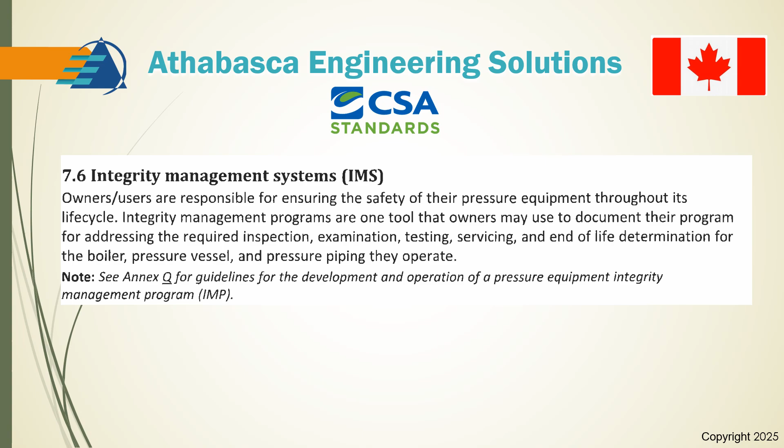So Annex Q is entitled the guidelines for the development and operation of a pressure equipment integrity management program, an IMP. So they don't provide any specifics. This is basically for information. So when we dig through this, we find that the first relevant section is Q4.2, Integrity Management Program Planning. And all it says is that the owner or user shall establish documented plans and schedules for inspection, condition monitoring, and other activities related to the IMP.

It also goes on to say in 7.2, performance monitoring and measurement, the owner/user shall establish and maintain documented procedures for periodic monitoring and measure of performance to an integrity management program. Performance measures shall include, for example, A, conformance to the established requirements and acceptance criteria, and that could be, for example, the wall thickness of a pressure component. And B, the effectiveness of achieving the objectives and the targets. So that could be looking at the rates of degradation of the equipment.

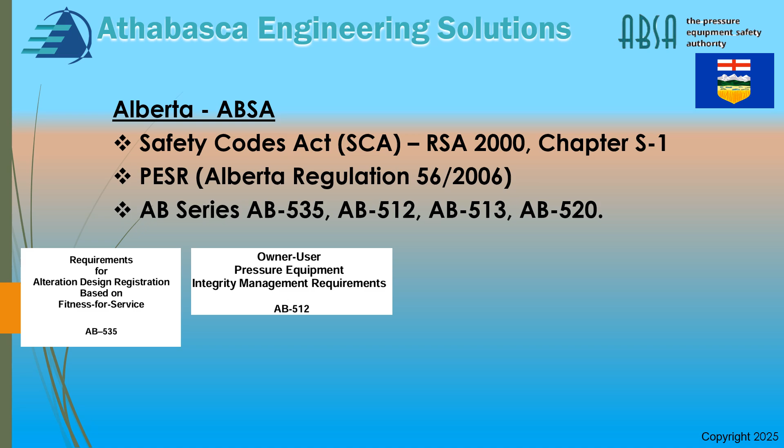And they go on to look at the requirements for the alteration, design, registration based upon a fitness for service assessment. That's what AB 535 is about. Secondly, we have the owner user pressure equipment integrity management requirements called AB 512. And it's also called a PEIMS by that jurisdiction. A little bit more about AB 513 is the pressure equipment repair and alteration requirements. And finally, they have a lot to say about finite element analysis, FEA guidelines regarding the use of FEA to support the pressure equipment design submission.

And out of all the jurisdictions in Canada, I can't speak for Quebec, but Alberta has the most extensive guidelines out of any of the jurisdictions that I've worked with in Canada by far. So if you're working in, say, Manitoba, you may want to consider looking at how they do it, because there's a lot of good advice there. It doesn't necessarily say that Manitoba, the jurisdiction, will accept that, but it has some really good approaches that are effective.

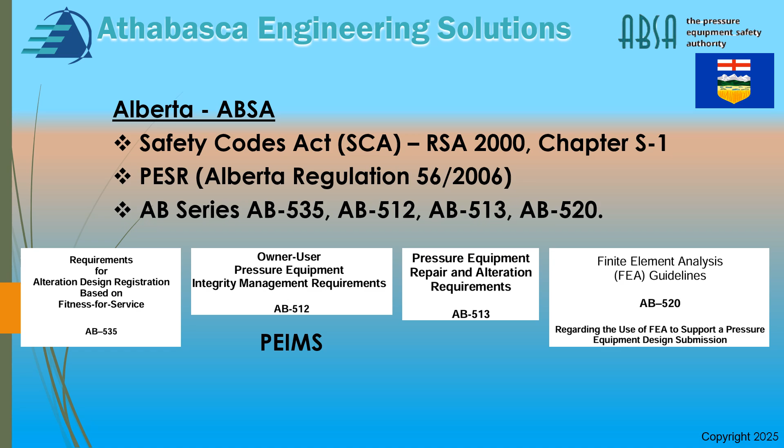Document AB 535 has some very specific conditions for use, and we're going to go through those. First of all, the Alberta ABSA jurisdiction, they need to have a valid reason for not performing the repair. So they don't just grant it. You have to demonstrate why you're not bothering to do the repair. Sometimes there's issues like time constraints during the turnaround, or the repair could further damage the equipment. It could risk further safety issues. Those are sort of examples.

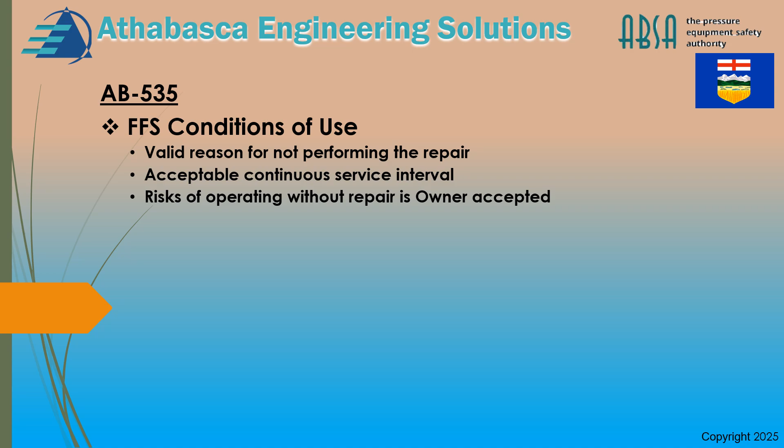Acceptable continuous service interval has to be established. The risk for operation without repair, it has to be very clear that the owner has accepted that responsibility. It's not on ABSA, and it's purely an owner responsibility. Procedures for the risk management and safe operation of the equipment. So there has to be, like, an established change process that gets reviewed, and risk assessment, hazard assessments, and those types of issues, so that the teams thoroughly understand the risks.

The operation of equipment must be managed by engineering and administrative controls, and the CSA has sort of outlined those requirements of having an integrity program. Record keeping and maintenance and monitoring programs are required, so there must be inspection records, maintenance, monitoring programs. So they may do some online thickness measurement, routine thickness checks, or monitoring crack growth, and that kind of thing.

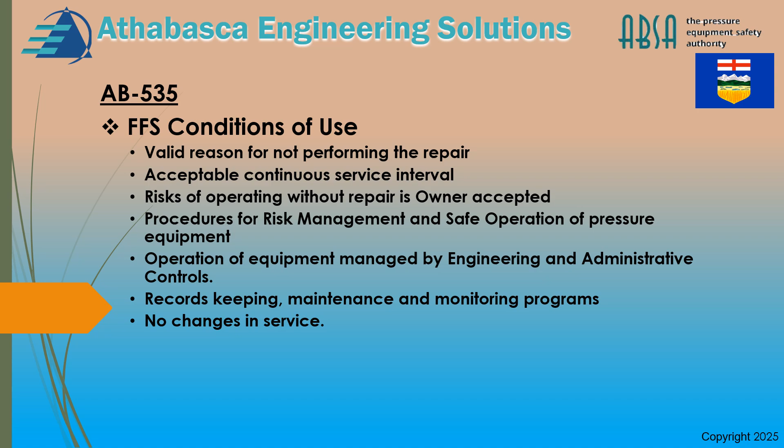And there can't be any changes in service. Say, for example, you want to increase the pressure on that system, and this code is a post-construction code. So you'd have to go back to the basics to do any changes in service from that point of view. So you can't use fitness for service for that application.

So what are the limitations to FFS? Well, let's look at that. The first thing is pressure equipment in public occupancy. That means, for example, hot water heaters and HVAC related items in buildings. This program does not apply to that. You fix it or replace it, that kind of thing. PR devices and their flanged connections, it doesn't apply. New construction, because fitness for service is considered post-construction. It's a post-construction spec, and the rules are different.

In upgrading of in-service pressure equipment, trying to re-rate equipment based upon fitness for service is not permitted. I mean, if you want to do re-rating equipment, which I do quite a bit of, you still do inspections, but you do the calculations based upon the new code for the uprating, but you don't go ahead and use fitness for service to do upgrades.

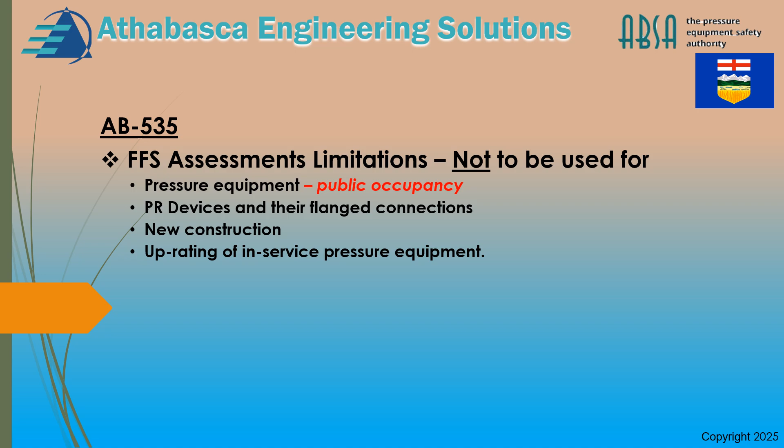Alteration limitations. The document says that when the acceptance is for a limited period of time, a condition, it can expire if the interval has expired. Say, for example, you have an interval of 2 years. It can be acceptable before you have to do a reevaluation. Then, if you extend that, then the acceptance has expired.

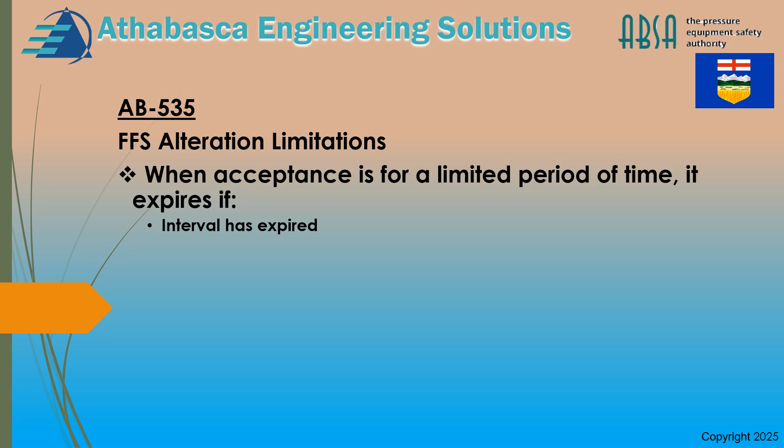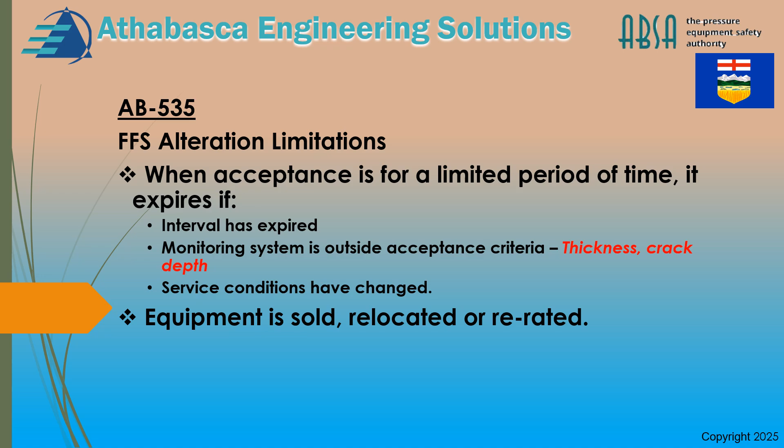The monitoring system is outside the acceptance criteria. So if the cracks have grown beyond that with monitoring and crack depth, for example, then it's expired. And also when service conditions have changed. One more thought: when equipment is sold, relocated, or re-rated, then basically the acceptance has expired.

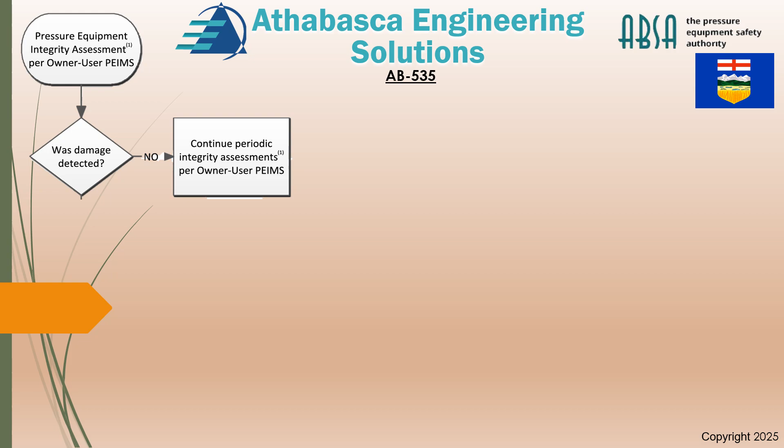Okay, let's look at the diagram. So this is the flow chart found in AB 535, pressure equipment integrity assessment per owner-user PEIMS criterion. Now, the first question is, was the damage detected? If there is no damage, then you would continue the periodic integrity assessments as per the owner's PEIMS. If it's yes, does the equipment meet the registered design? And if it's yes, then we would continue to do periodic assessments per the owner's PEIMS.

Now, if it's no, will the equipment be repaired? That is the second question. Then you would complete the repair as per the owner-user manual and the CAP, or following the ABSA AB 513 criteria. Will the equipment be derated? Because you can fix it, or you can derate it. If it's yes, then you need to complete an alteration form, that's AB 513.

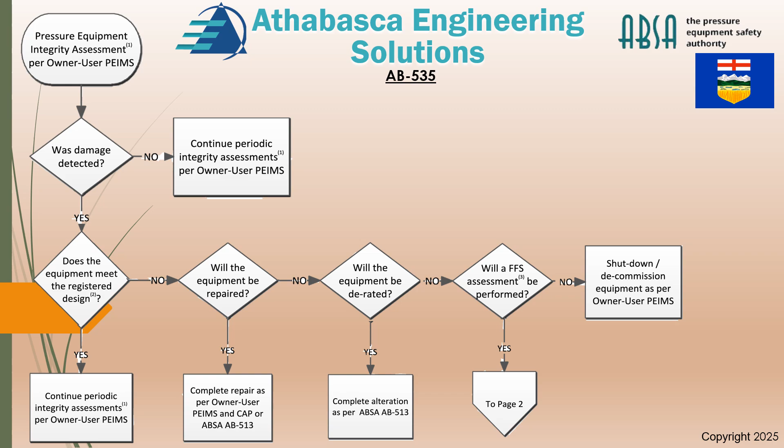Next question, will the fitness for service assessment be performed? If it's yes, then we'll go to the next page. We'll talk more about that. If not, shut down and decommission the equipment per the owner's program.

So the next thing is we look at Part 2 of the National Board Inspection Code, and we look at that criterion. So for example, if we do the assessment and it's yes, then we move on to the next. It says, does the equipment meet the registered design? And then the flow chart will say continue periodic integrity assessments as per the owner's program. And it references AB 512, which is one of the key documents we mentioned earlier. And if it's no, then we basically have to document the assessment as per the owner-user program.

Now, if we have a fail when we do the National Board Part 2 inspection, then we have some more decisions to make, and we would follow API 510 pressure vessel inspection, and we would do the analysis of the corroded regions. And this is where we do a fitness for service assessment per section 7.4, which was valid at the time of this recording. And now if we say, yeah, we're okay, we pass, then we head down the path where we were before. If it's no, then we would go and do a full fitness for service test.

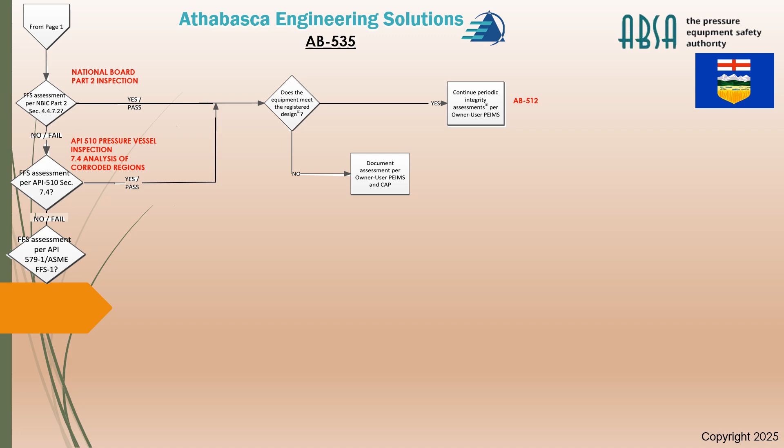And recall that the first step is to have a proper inspection report done prior to actually doing the assessment. And the next thing is we would decide whether we're doing a level 1 or 2 assessment. And level 1, as we recall, is a very basic calculation intended to be for the inspector level assessment, and it's the most conservative. So if that passes or fails, then we can go to a level 2, which is far more detailed, and usually a fitness for service qualified engineer would do that one. And that's how we sort of drill through this.

So then we go to the next one. We say, yeah, we passed that assessment. Now, does the owner have a fitness for service quality plan? And if it's yes, then we continue on to, is the FFS assessment within the scope of this quality plan? And if it's yes, then we can continue to complete the fitness for service alteration as per the owner-user program.

Now, if we go back to the left side here. So if we say we didn't pass that fitness for service assessment, then we'd have to look at alternate methods, right? So then we would go through the alternate methods, and basically we would follow the procedures as per the alteration procedures found in AB 513.

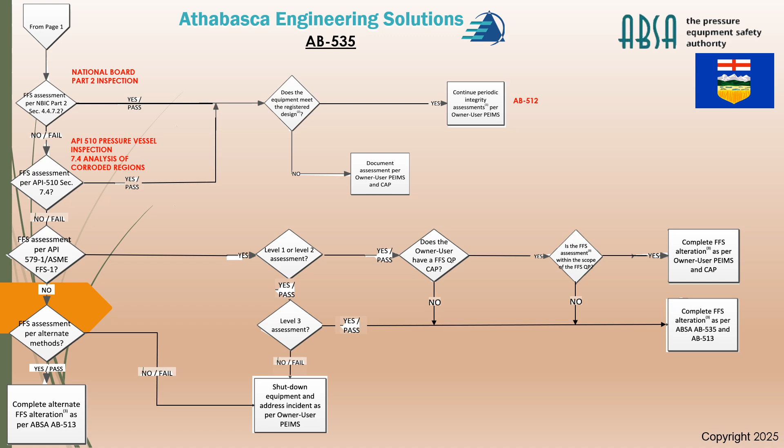So everything sort of dumps out into complete the fitness for service alteration as per 535 and 513. And that's the criterion or the flow chart for AB 535, the procedures that you would follow. So the pressure vessel news has some thoughts about fitness for service, in particular cracks. There's a lot to say, actually. There's an issue with the environmental considerations with actually understanding the fracture toughness, which is KIC. I'll elaborate a little bit more.

So they say the use of a plane strain critical stress intensity or fracture toughness KIC, whose value has not been reconciled with the environment under consideration. And so basically what they're saying is when you're trying to find this toughness data measurement, you have to make sure that you understand the environment it's under, and if you don't, then the calculation may not be correct.

There's also problems with these kinds of values for evaluating cracks in welded joints. And that's because there's a stress intensification factor, there's a metallurgical aspect, there's a heat affected zone, and there's also the amount of strain in the welded joint, and all these things can change that criteria.

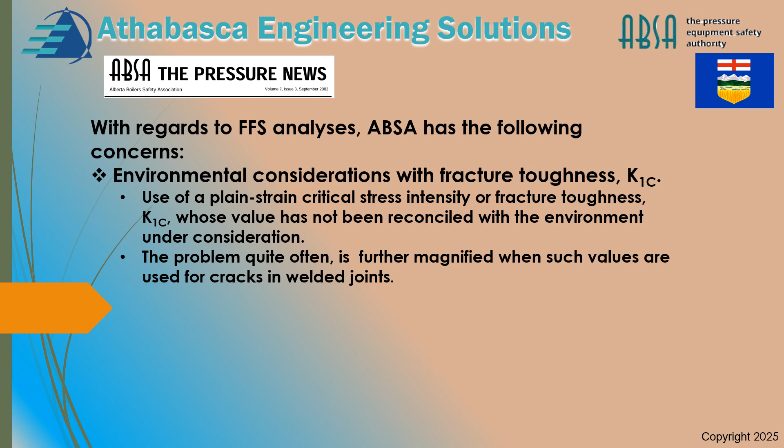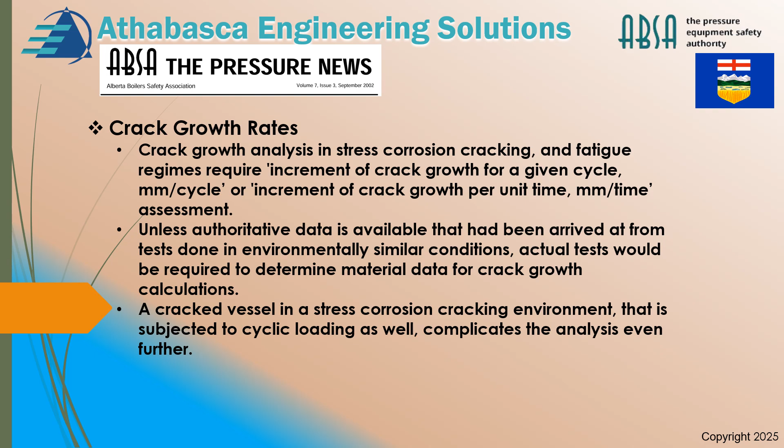So a lot of data for crack growth rates is based upon test data in the lab, and it rarely reflects reality, and so predicting crack growth rates is quite difficult. A cracked vessel in a stress corrosion cracking environment that has been subject to cyclic loading can really complicate things as well.

The pressure news has some thoughts also on inspection and data gathering, and for me, it's always been a lot of grief, especially in the early years when we did assessments and the inspectors didn't always understand the kind of information they had. But thanks to more training, the inspection data gathering has gotten considerably better. So for cracks, methods used for determining the state of stress in a component should include capabilities to compute the stress distribution under the loading conditions and the structural configuration. Okay, so really understanding and being able to model the whole configuration.

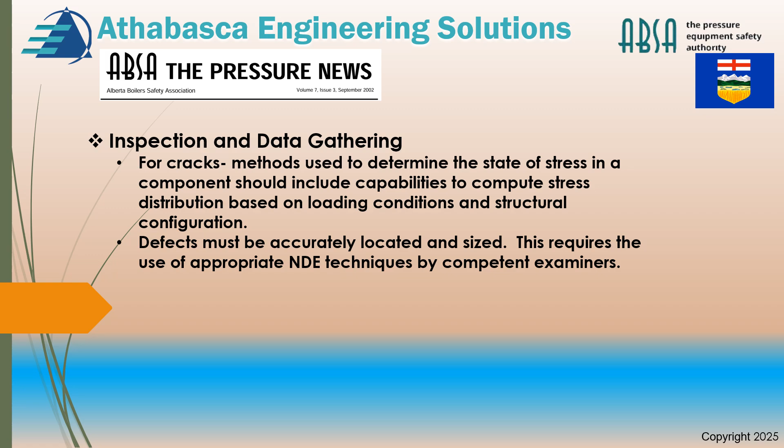The other thing is defects must be accurately located and sized, and this requires the use of appropriate NDE methods and techniques by competent examiners in order to make sure that all the data is there and correct. And the capabilities of the equipment suitable for NDE techniques must have confirmation of competency of the technicians using them, and there should be things like calibration and all those other criteria that have to be followed.